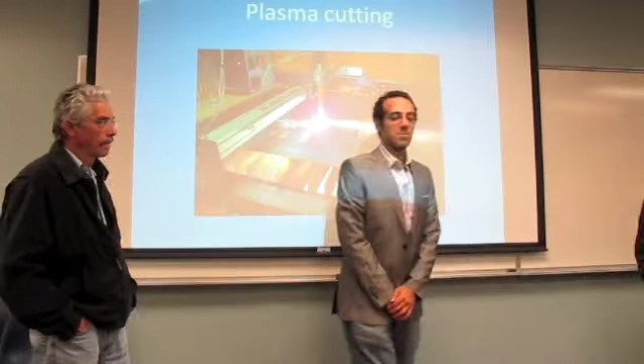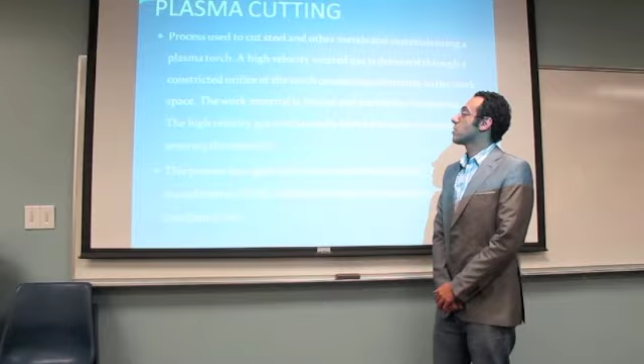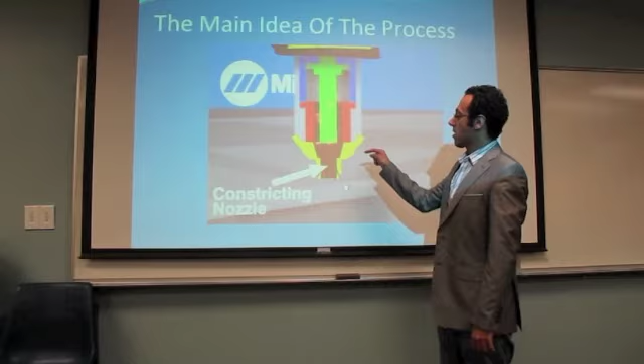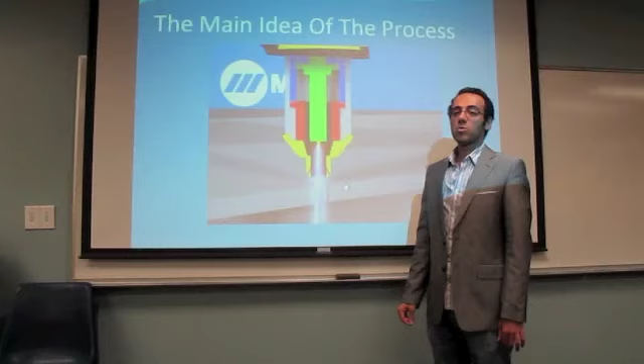I'm discussing the main idea of plasma cutting, which is a process used to cut sheets of metal, pipes, and different kinds of metals. This slide shows the torch and consumables involved in the process. The gas with high velocity comes into the nozzle, the electricity makes an ignition, and the gas, burning at 25,000 degrees centigrade, cuts the material.

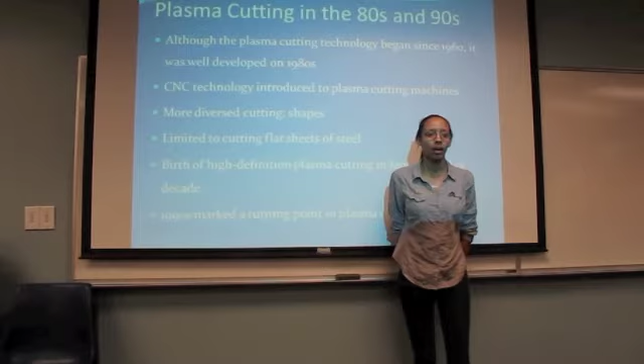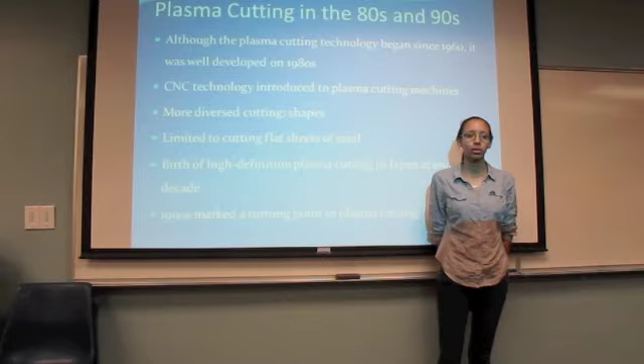Computer numerical control, or CNC technology, was integrated into plasma cutting machines in the late 1980s and into the 1990s. This gave plasma cutting machines greater flexibility to cut diverse shapes based on a set of programmed instructions. However, they were limited to cutting flat sheets of steel using only two axes of motion, or XY cutting. Japan saw the birth of what came to be called high-definition plasma cutting at the end of the decade, and the 1990s marked a turning point for plasma cutting.

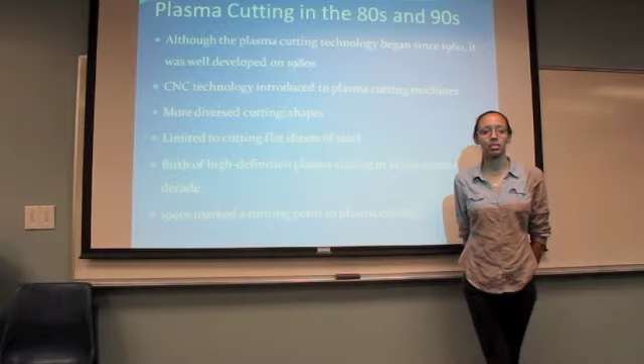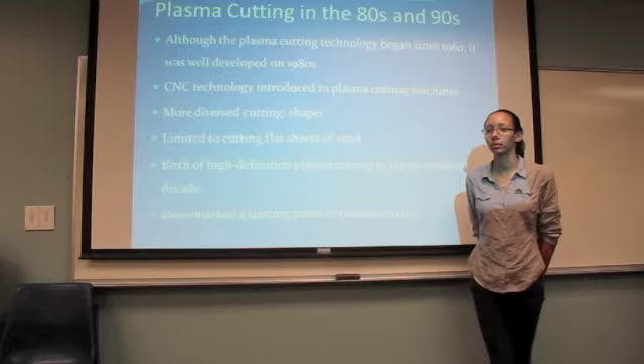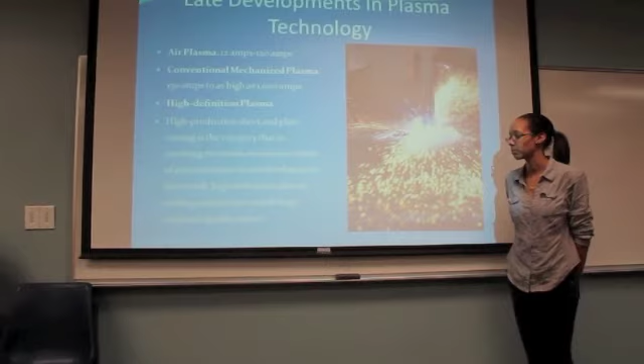Plasma cutting became as competitive on mild steel as it was on stainless steel and aluminum. It became a cost-effective alternative to emerging laser and traditional oxyfuel methods. In later developments, air plasma went from 12 amps to 120 amps, and conventional mechanized plasma went from 130 amps to as high as 1,000 amps. High-definition plasma emerged in the 1990s, and high-production sheet and plate cutting became the category receiving the most attention in process research and development. As a result, high-definition plasma cutting systems made huge strides in quality and speed.

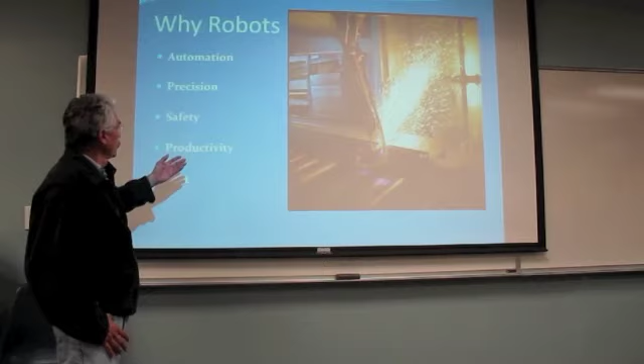Why include robot technology in plasma cutting? Automation helps plasma technology achieve precision and safety, because it's a very aggressive environment for people inside - this is very good work for a robot. With automation we increase productivity and lower cost. The plasma cutting robot allows easy programming and handling, reasonable investment, high cutting speed, precision, quality, and very good results.

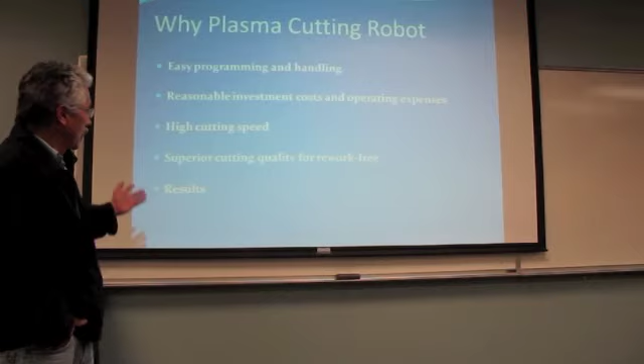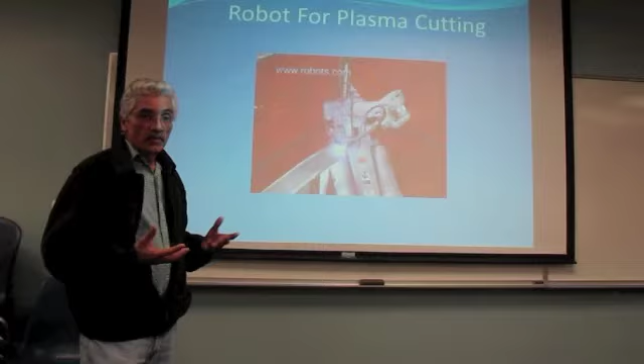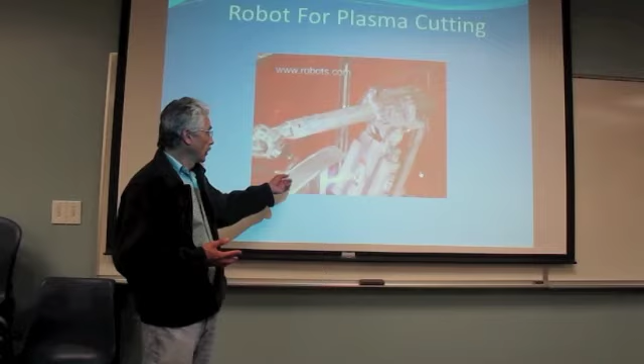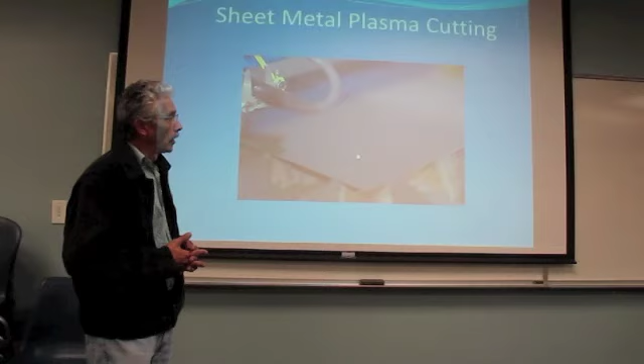In the early times, serial arms in 3D were well developed to improve this technology. We can see how this 3D robot works in this case - it can work with different shapes: pipes, planar sheets, etc. Sheet metal plasma cutting is widely used in the automotive industry and in workshops across many industries.

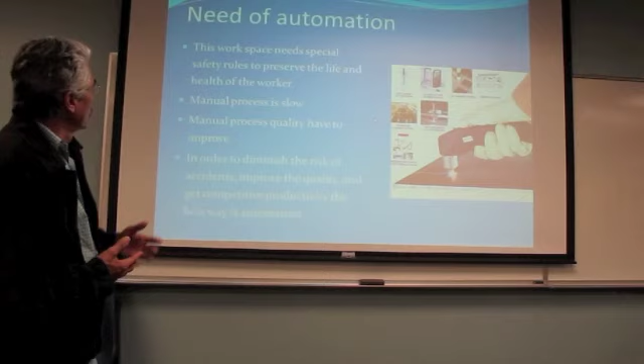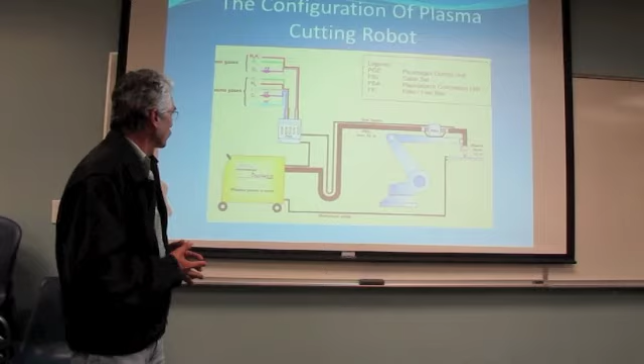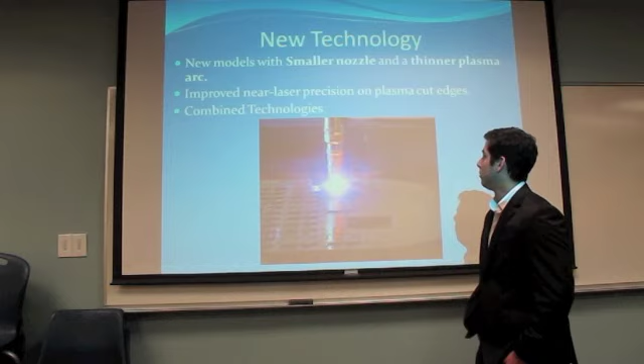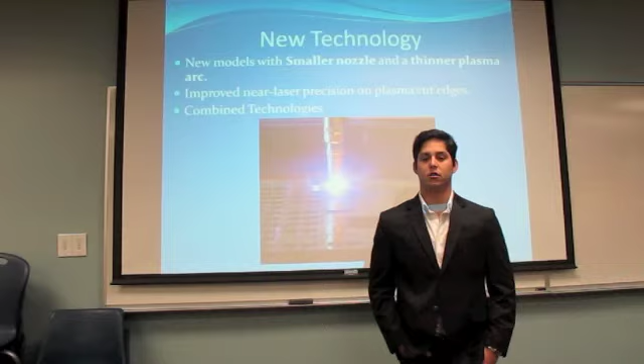We can see the basic principle of using robotics in this technology. We have the power supply here, the gas supply here, gas hoses, power supply cables, the electrodes inside the torch, and the mass connected with the work table. With new technology, the new models come with a smaller nozzle and thinner plasma arc. This improves precision - these are near laser precision levels on the plasma cut edges.

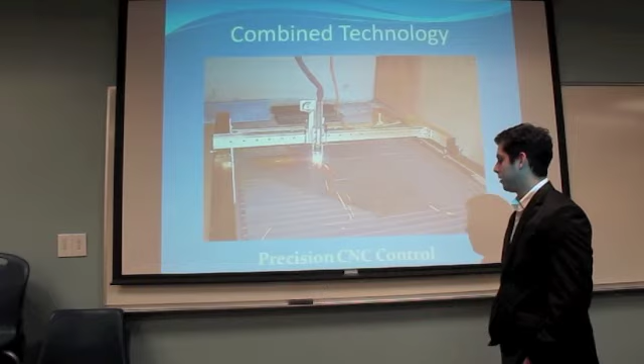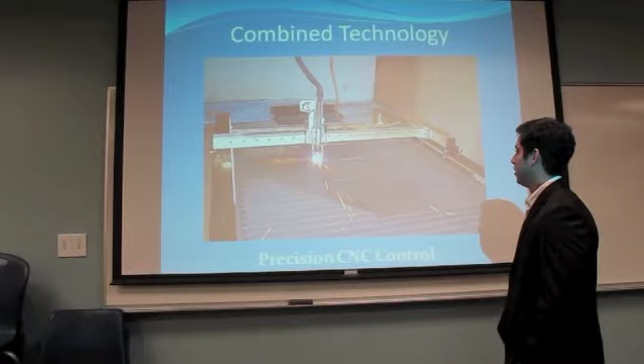On the next slide, we can see how combined technology is used by some companies. They use precision CNC control on a control basis with a program, and the companies leading nowadays in the robotic industry selling these plasma cutting robots are Motoman, KUKA, Panasonic, Fanuc Robotics, and ABB.

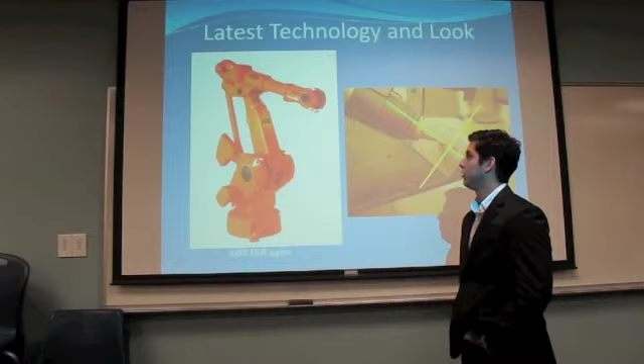On the next slide, we can see how a robot looks today. This is an ABB IRB 4400, the latest technology, with a better precision cut. This is a 6-axis robot that applies the latest technology in plasma cutting with highly improved precision and flexibility. So the future for plasma cutting robots is in the automotive industry and for parts in dairy industry applications.

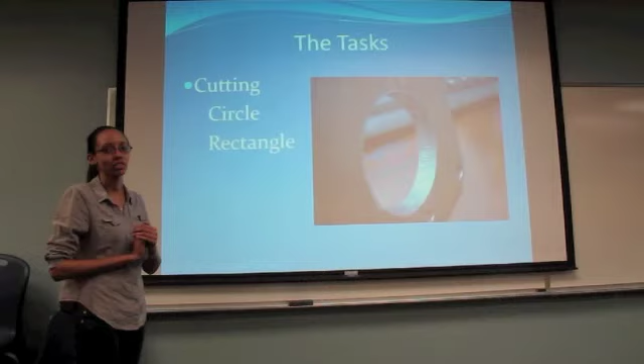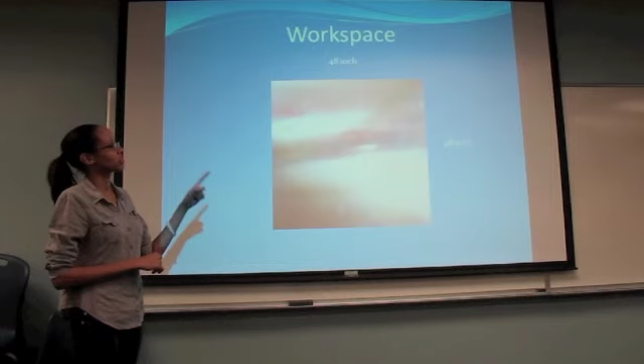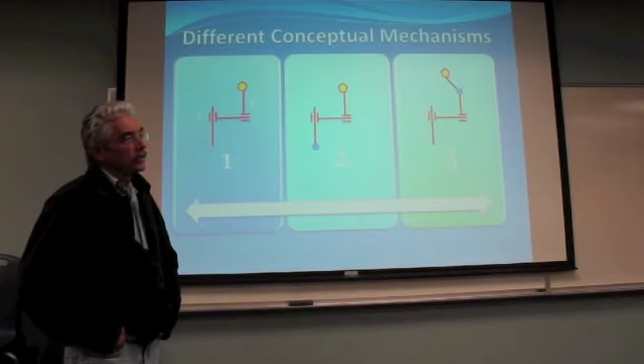For our design, our task was cutting a circle and a rectangle. This is the workspace, 48 inches by 48 inches, and we have different conceptual mechanisms. We were analyzing the different mechanisms to perform this work with the plasma cutter.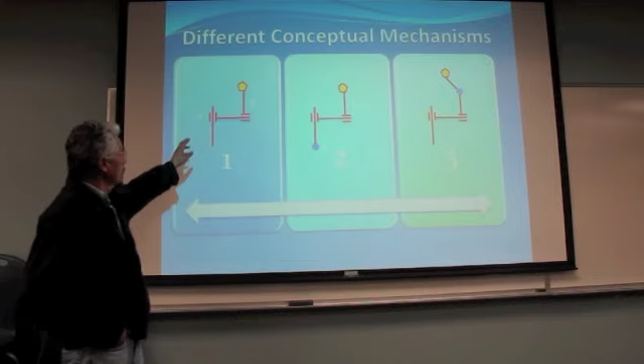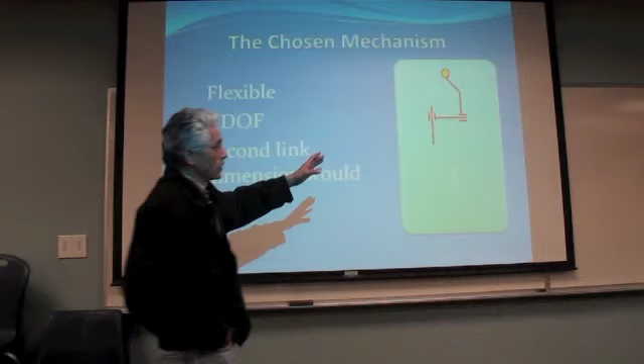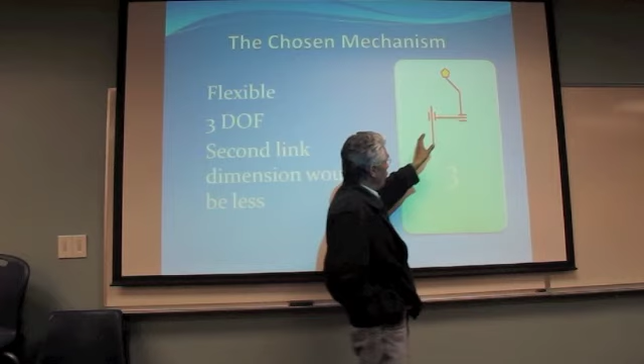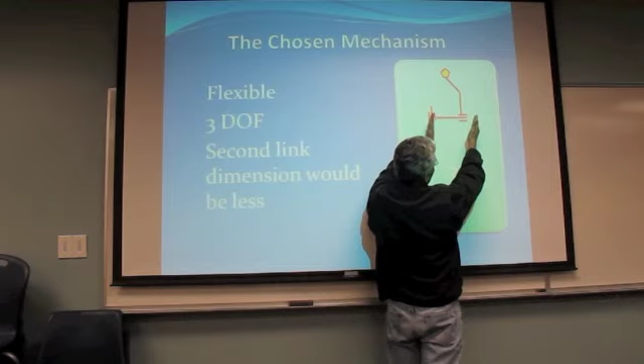Finally, we have three kinds of mechanisms: PP, RPP, and PPR. We selected the PPR planar robot. This is the most flexible robot we chose, in 3D with 3 degrees of freedom. In this case, with this link rotating, we can optimize this link - that is the best advantage of this selection.

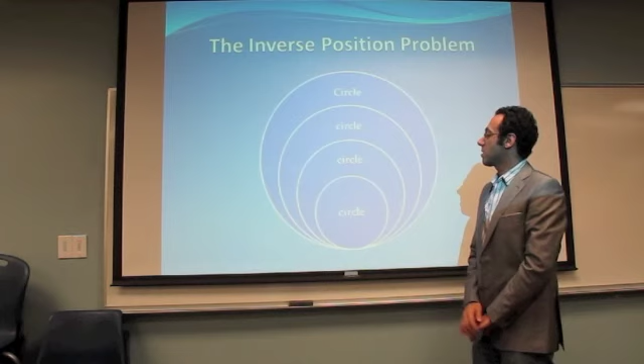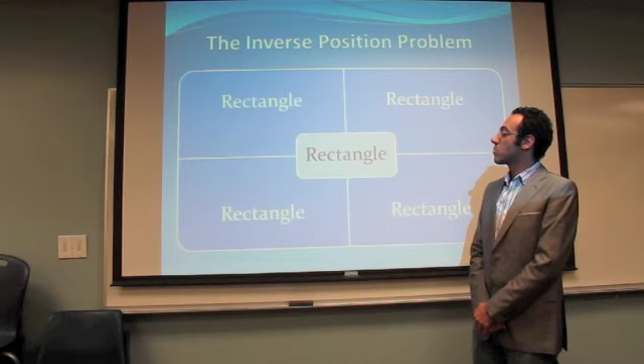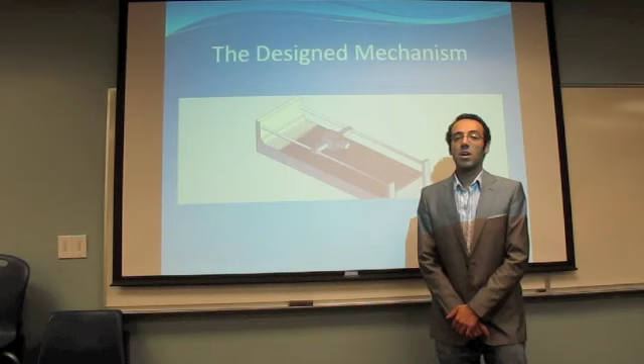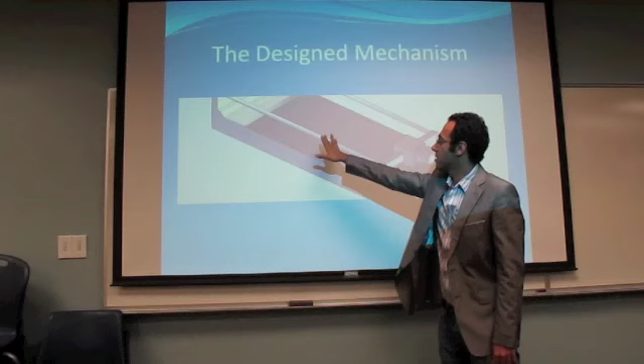The inverse position problem we had to solve is the path that the end effector should follow - this is the circle path, and this is the rectangular path that the end effector should follow. So we designed the robot so it can do both. This is the robot and mechanism we designed and modeled in SolidWorks. As you can see, this is a prismatic joint, and this one as well is a prismatic joint. So this robot, if you imagine this is the sheet metal, can do the cutting process.

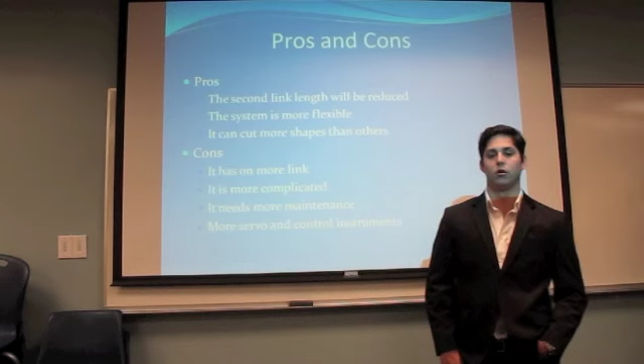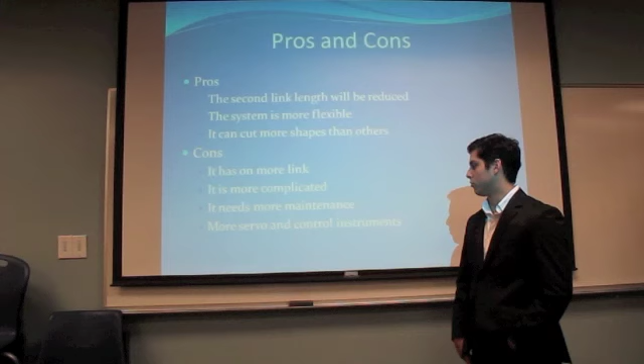There are some pros and cons of our mechanism and design. The pros are that the second link length is reduced, so the system is more flexible and can cut more shapes than others. The cons are that it has more links, which means it's a bit more complicated and needs more maintenance, more servo and control instruments.

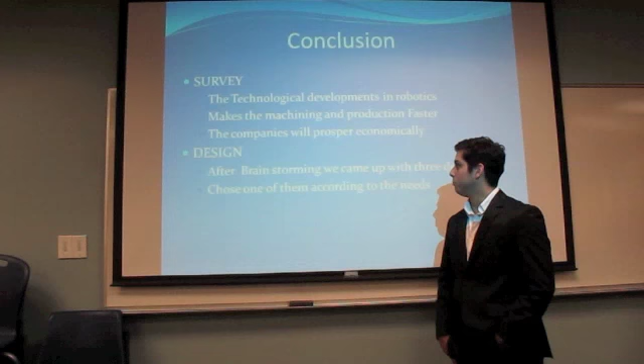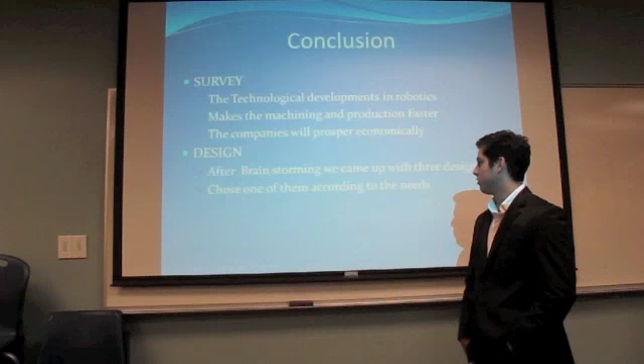For the conclusion of our project: on the survey part, we saw how technology developments in robotics make machining and production faster, and how companies prosper economically. For the design part, after brainstorming with my teammates, we came up with 3 designs, and we chose one of them according to the needs.